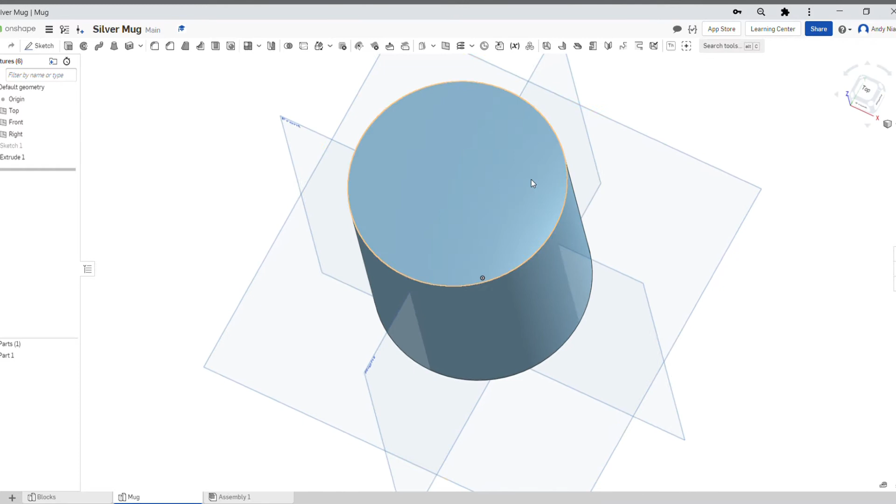So we're starting off with a cylinder, 80mm diameter and 90mm height. We want to make this hollow, and we want to add the handle out here. I'm going to start by adding the handle because I'm going to use an extrusion on the top to hollow it out at the end.

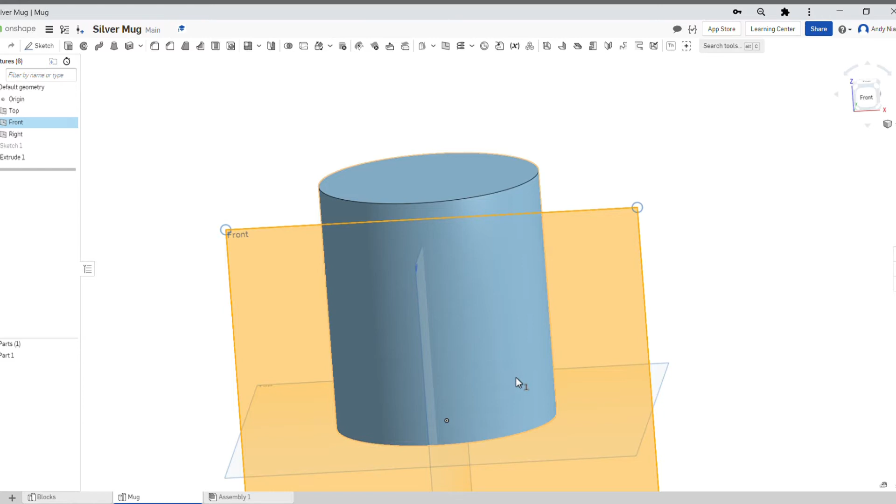So this might be an easier way of doing it. Where am I going to draw it? I'm going to start on this plane here that goes right through the middle. I'm going to draw the sketch for the handle here, then extrude either side of that plane, so I get a little bit behind and a little bit in front.

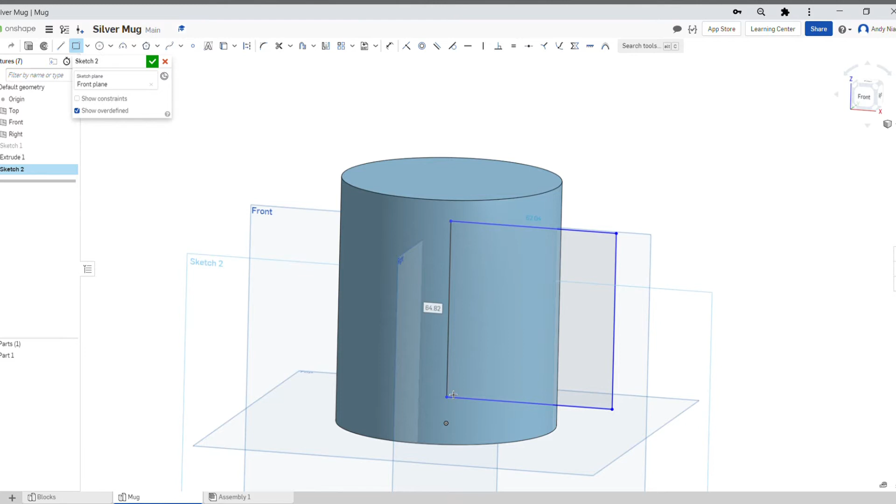So if I go for a sketch now, I'm going to start by just drawing it as a rectangle, something like that, and it's going to be 67. I've started my rectangle in line with the middle of the cylinder. So that line there on your drawing is going to be 67, and this one here is going to be 60, I think. Correct me if I'm wrong.

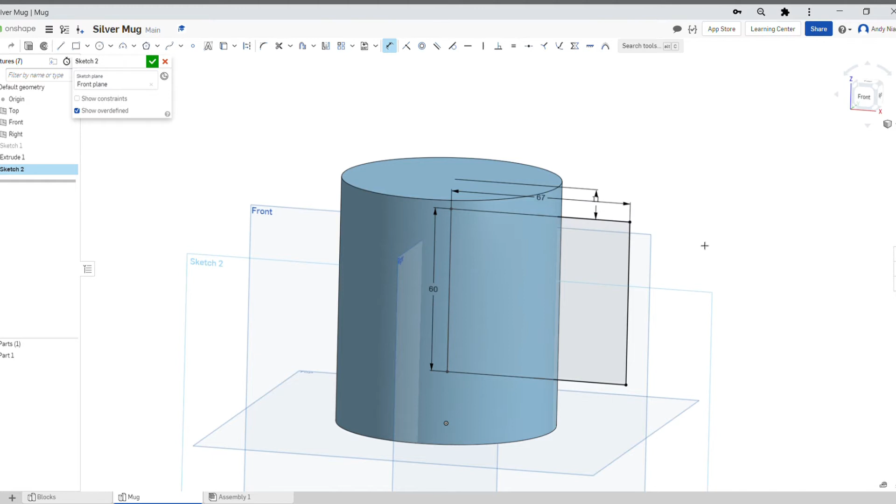We also know that the top of the handle is 11mm down from the top of the mug. So that is the outside shape of my handle. There's going to be a curve here, but I'm going to put that on in a minute.

There is a hollow though as well on the inside, so if I pick that up, that hollow is going to be 5mm shorter. So if I do 62 there, that's going to be 10mm up, isn't it? So it's going to be 50 because it's 5mm up and 5mm down. I just need to make sure that they're in line.

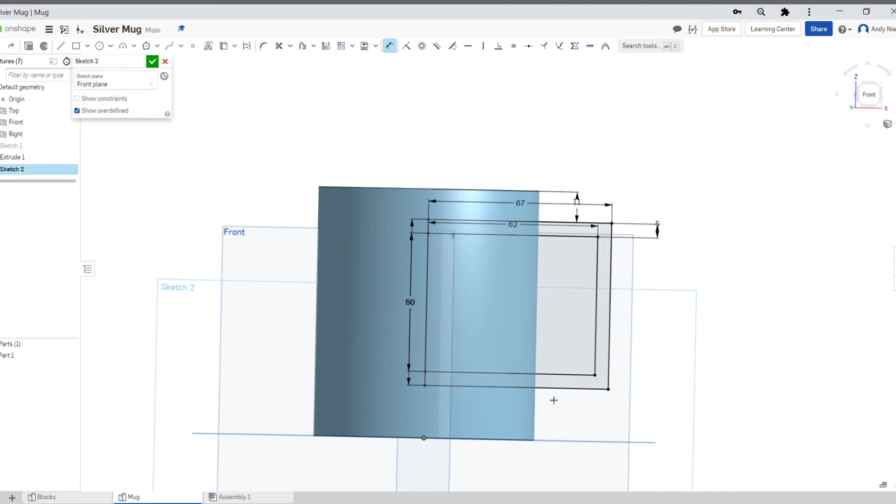So if I put a dimension like that, I've now got this bit is 5mm wide, it's 67 from the center to the outside, it's 11 from the top to the top, and it's 60 high. So I can finish that.

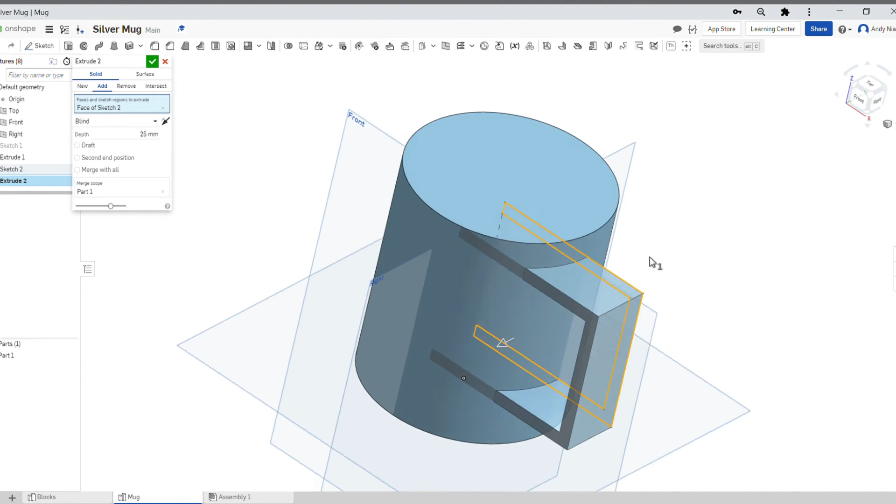Now I can do an extrusion, and I can just select all of it. I can select the inside shape, I just want to select that outside shape there, look, and that's going to create my handle. Now you can see it's all going to one side.

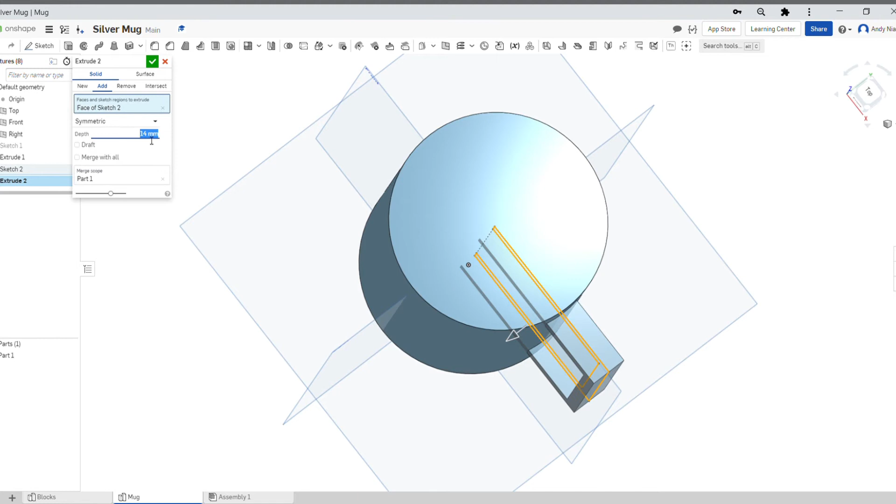I want a little bit this side and a little bit that side, and the way I do that is by selecting this little drop down menu, and if I go symmetric, it will put whatever that size half this side and half that side. So I can now create a feature around the middle. That should be 14. And that is the shape of the handle.

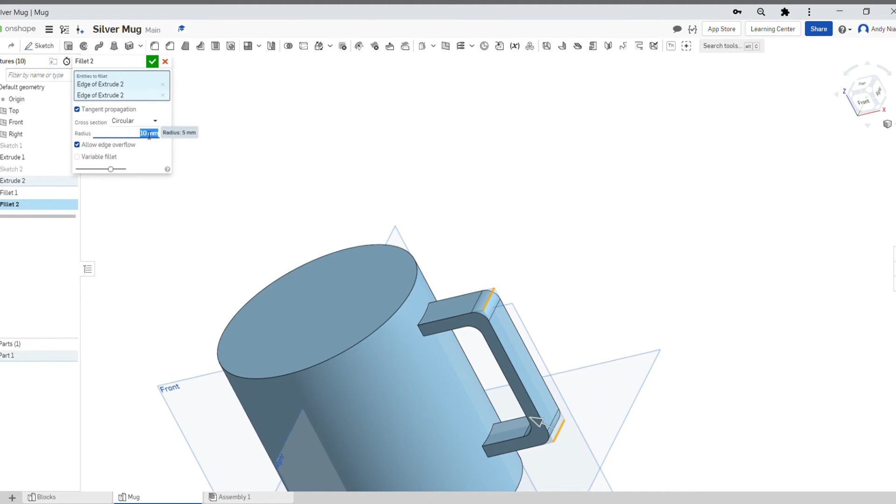Now there's some fillets, so you could put the fillets in the sketch. I'm just going to very quickly put them in here instead, because there's one there and there's one there, and then there's another one on the outside which is going to be 10. I'll make that 10. So there is the shape of the handle.

Now you'll remember when I did this handle, I've actually extruded all the way inside. The reason I can do that is because my next step is going to be to cut this out. If I'd already cut this out, then when I created my handle, I would have needed to have finished it inside the wall of the mug. But if you've done it that way around, you can play around with where your extrusion starts or stops.

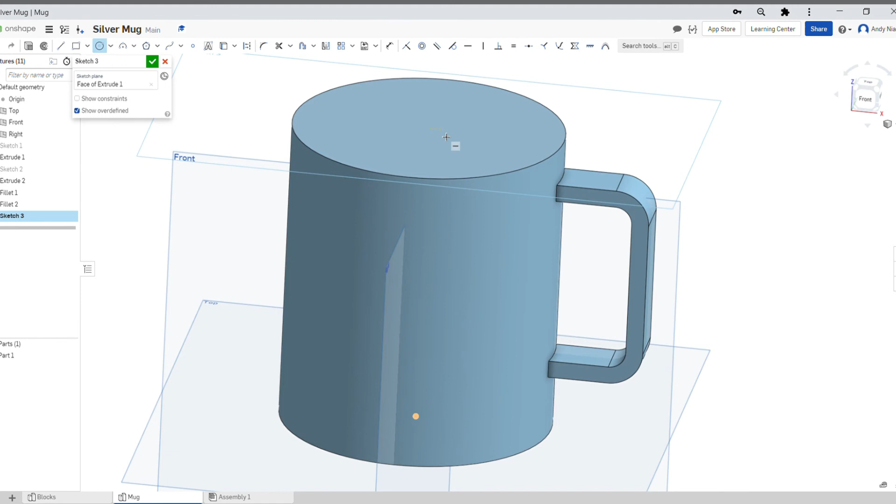So I need to draw another sketch on here. It's got to be a circle, directly above the center. There we go, and it's going to be 74, and it's going to be extruded. It's going to be an extrude subtract, and it's going to be 87 because it's 3mm in total.

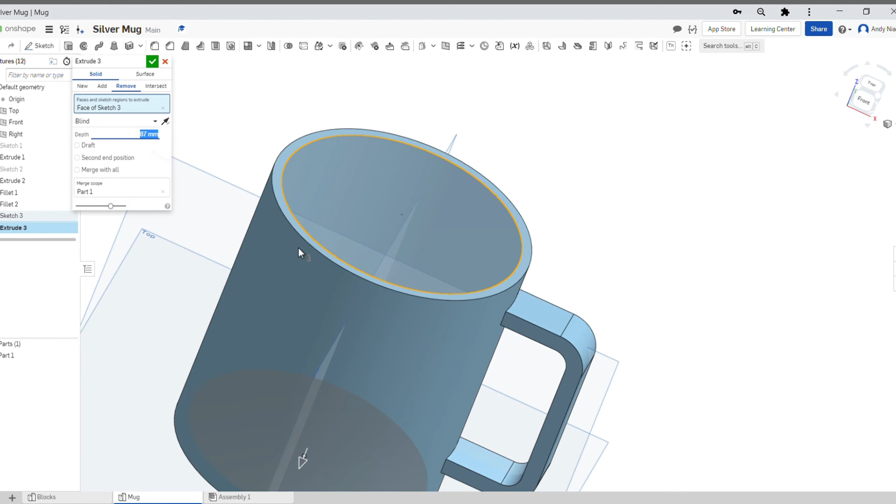Okay, so there's my mug, and I think there's one more fillet on the bottom, which is a 2mm fillet here, if memory serves me right. So there's my mug. So you can see if I had done that extrusion first, then obviously my handle would be sticking out here, so I'd need to finish that further back.

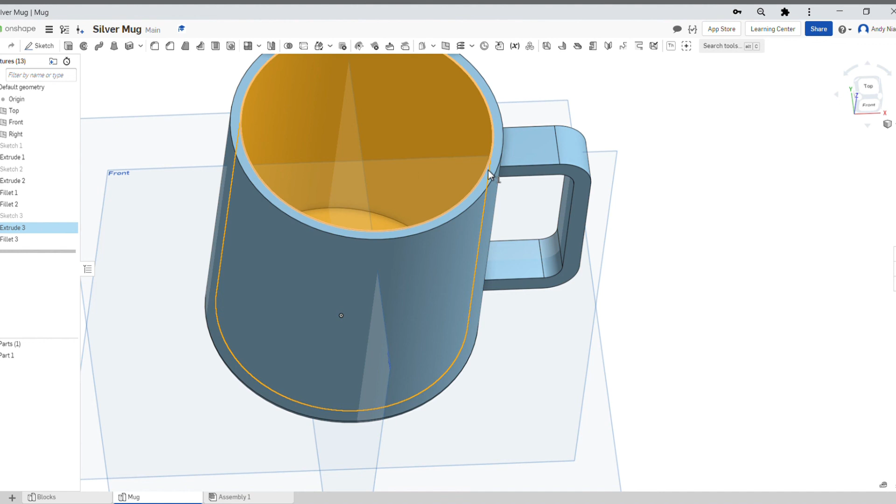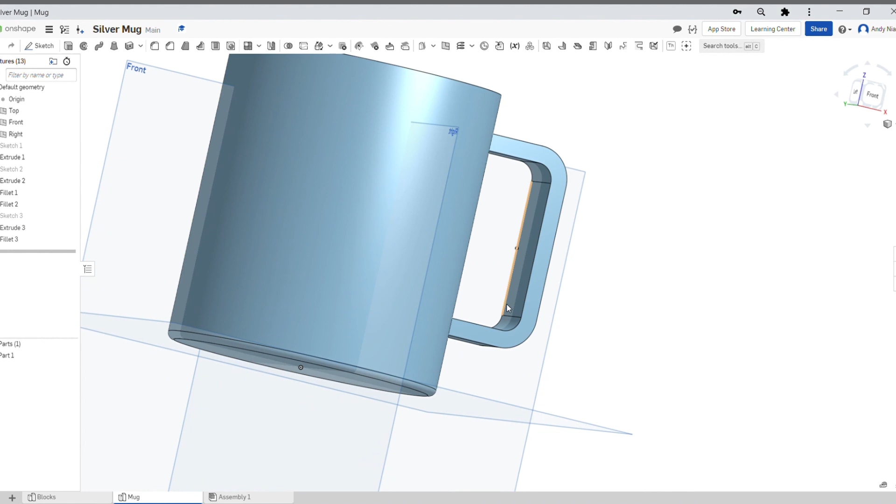So things that we've maybe looked at is drawing a sketch on a plane, and then extruding either side, extruding symmetric. We also created a sketch that had several rectangles involved, and we just selected the one we wanted. Then we've simplified matters by creating the fillets on the model rather than on the sketch, which can sometimes get us in a bit of bother. So see how you get on with that.